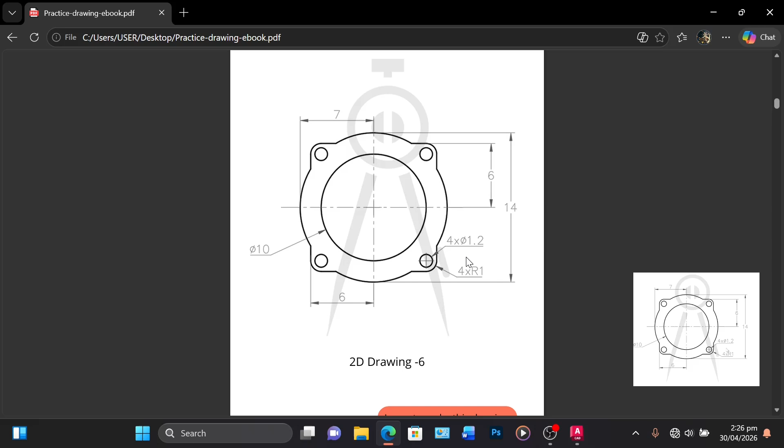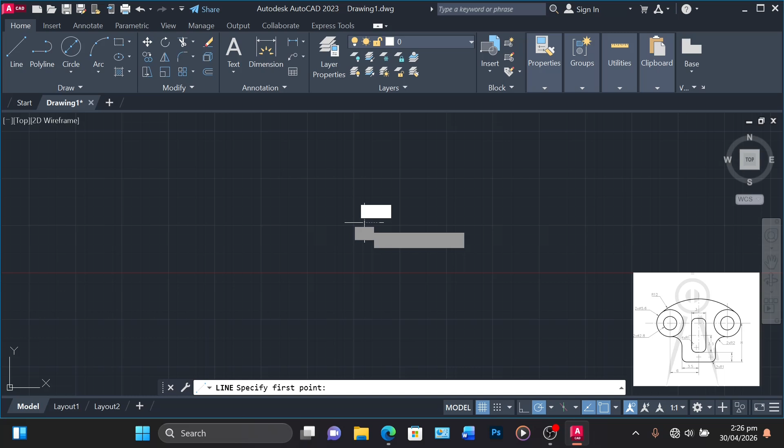Alright, so a lot of people try to use a lot of guidelines, right? Try to keep it as clean as possible. So I prefer using the drawing itself to guide me to get other parts. I'll just show that to you in a while.

So right from the start, let's start with the circles. 5.6.

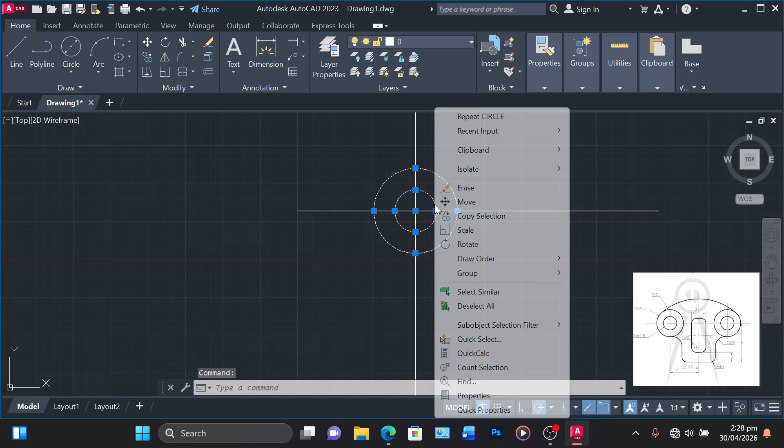So that's what I'm doing right now. Instead of drawing center lines to draw two sets of circles here and draw two sets, I simply have a universal center that I use to get everything, to address, to clean it up a bit, so that I don't get confused.

This is just to assist my trim so that I have the lines exactly on the center of the circles there. Alright, let's go on.

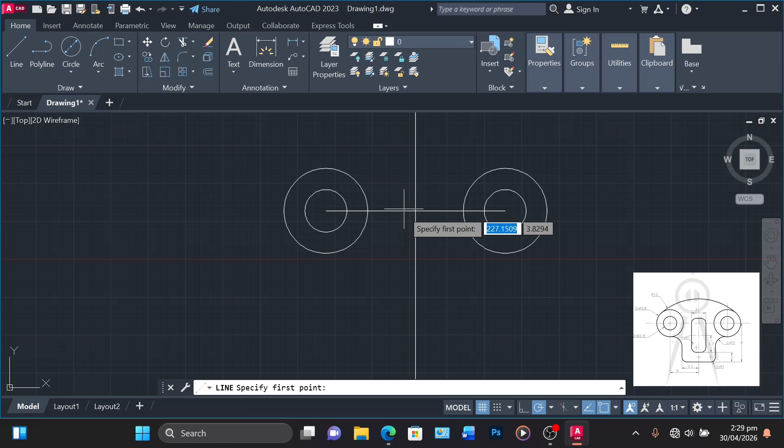Next we have a line at the base that is 7 units in length and 8 units from the center. So simply we draw a line 3.5 to the left and 3.5 to the right.

We select the two lines, press J to join them. We have our line, a line with 7 units. We move it down by 8 units, press enter. There you have it. Then it goes up, let's just take it. Alright.

So we are connecting these. The guidelines are there to assist you.

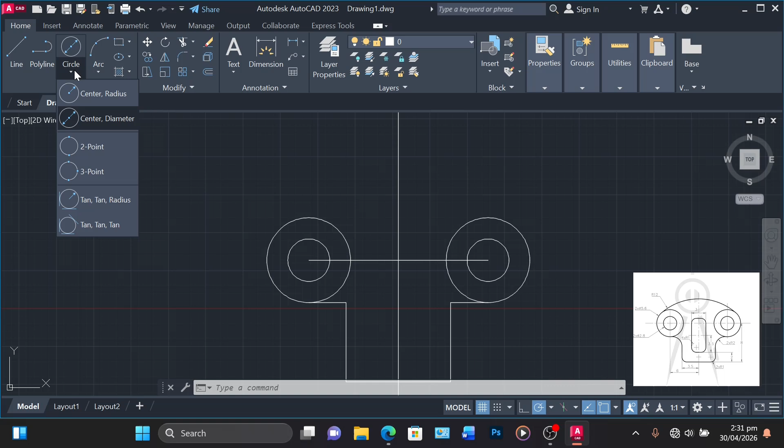Now this is an interesting part. For the upper circle, we use something we call tan radius circle, where we select 2 tangent, one here, one here, then we put the radius of the circle 12. And there you have it. Use trim, clear.

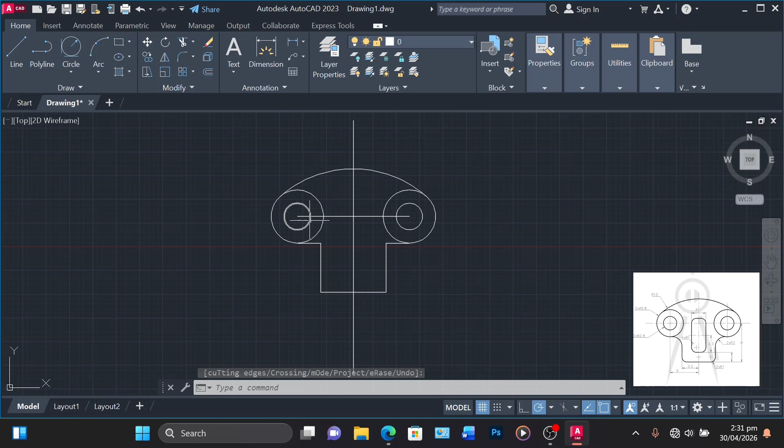And then for the edges, we use fillet, radius 2 for the end. Yes, press enter to just repeat the same command. Enter again. Since we are changing radius, we have to make the changes. Radius 1 for the lower side.

Easy for us. Select this line. Okay, let's input the distance. Since it's 3 from both sides, from one end to end is 3, and the center line is dividing it, so that will be 1.5 from each side.

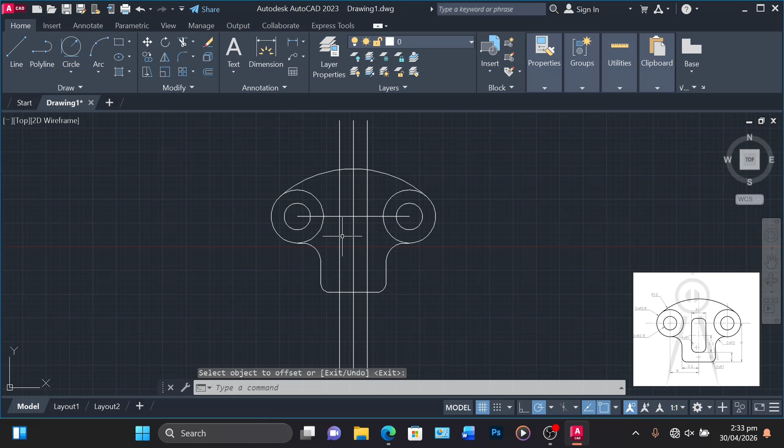Then from the bottom it's 2 units like this, and from there to center is 3.5, that means to the top would be 7 units, and then we trim. Fillets.